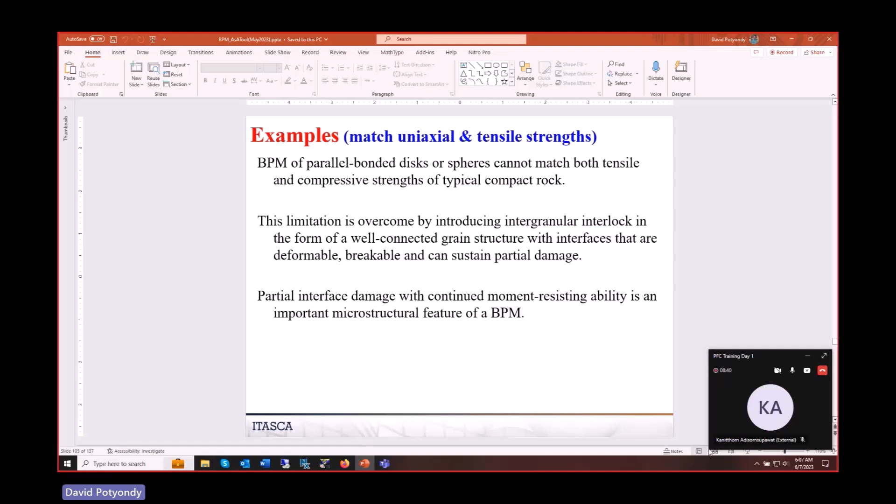It turns out that if you just use parallel bonded material, discs and spheres, you're not able to match both tension and compression, both tensile strength and compressive strength. You can match the tensile strength, but then the compressive strength is too low.

Now this is for a compact rock like granite. The compressive over tensile strength ratio of certain types of granite could be up to 30. The ratios that we get with parallel bonded discs or spheres are on the order of 5 or 6.

After many years of research by myself and others, and I can show you all kinds of journal papers from years back where people would do all these different things to try to get parallel bonded systems to achieve much higher compressive strength, we finally determined a way to do that, and it all has to do with having more interlock.

So the problem here is that with a parallel bonded system, I think it's shown here. Here's the issue. Turns out that this flat jointed material, I developed that model to solve this problem. And here's the thinking behind it.

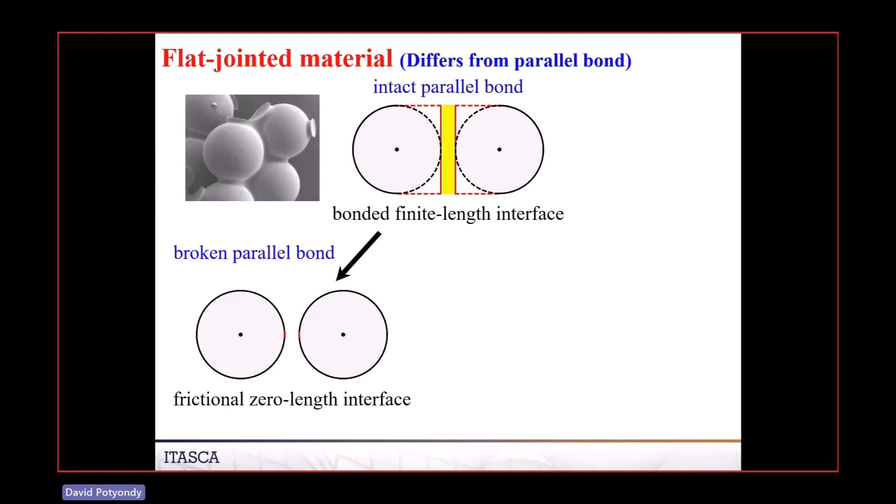But as soon as it breaks, the cement is removed, and the only thing you have now is just friction acting over that small area to try to maintain interlock, and that doesn't provide almost any interlock.

The idea with the flat joint is that notice the interface still remains - conceptually, that interface is still there. So it maintains this interlock, and the material holds itself together.

The reason this matters - let me see if I have an example - with the parallel bonded material, what you would do when you calibrate it is first do a direct tension test and choose the micro tensile strength so that you can match the macro tensile strength.

And what you find when you do such a model is that all of the damage you see in a direct tension test is micro tensile breakages, which means that the shear strength is not participating. The micro shear strength has nothing to do with the direct tensile strength.

So that means then what you do is say, okay, now I'm going to do a UCS test on this material. Now you can't change the micro tensile strength - that's done, that's been fixed. So the only thing you have left is the micro shear strength.

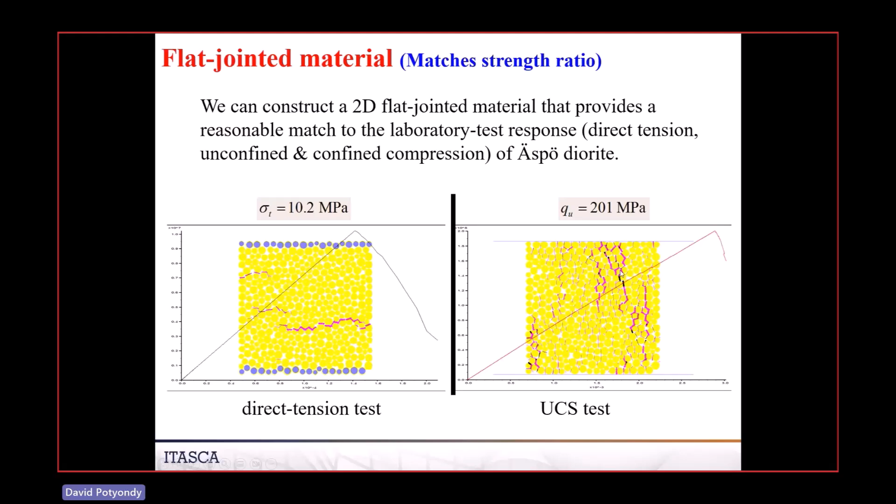The thickness of these lines is proportional to the gap, the current gap of how much open that thing is. Once at the peak, we've gotten this big amount of opening going on here, and we have quite a bit of distributed damage before that. If you look in detail at this thing, this is what's happening right at the peak load. You're basically getting a localization to happen here, and then it's proceeding downward to break the system.

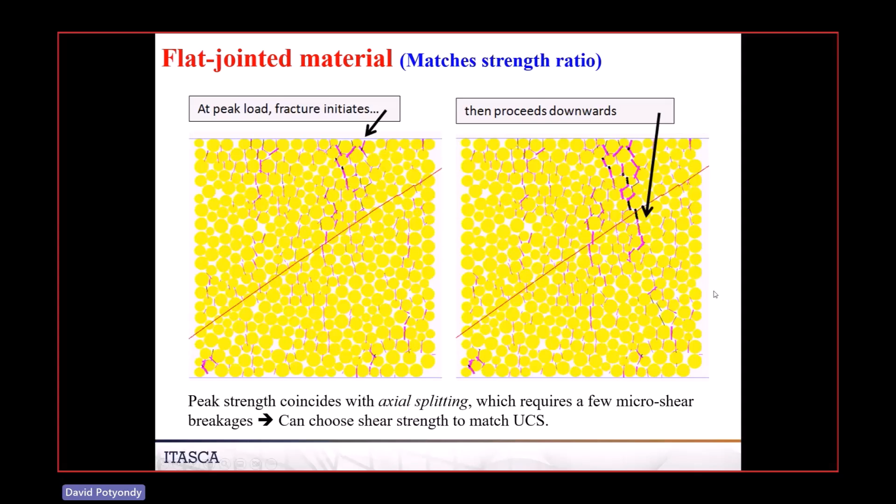In order for this to happen, the black color is micro shear failure. So in order for this thing to localize and create that axial split, there has to be some micro shear failure. That's the key thing that's allowing this thing to reach the peak, to begin to fail. So it's that micro shear strength that can be chosen to match the UCS.

If you look, it's a very sophisticated, complicated system. This is just looking at early on in the test at some region. If we zoom in on that and look carefully, we can see, for example, here, these two guys are actually rotating a little bit when you load it. There's all kinds of micro rotations that occur when you load these things.

That micro rotation now is causing tension on this side and compression on that side, and so you're getting this partial damage. If this was a parallel bonded contact, once the outer fiber reaches the tensile strength, the entire thing breaks and is removed. Whereas here, I get this distributed tensile breakage. It redistributes the load, it goes somewhere else. Here's another one that's beginning to fail.

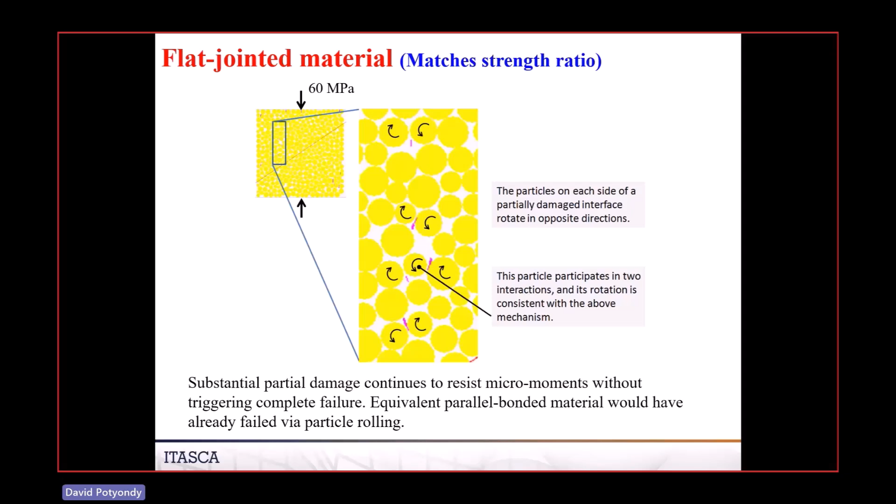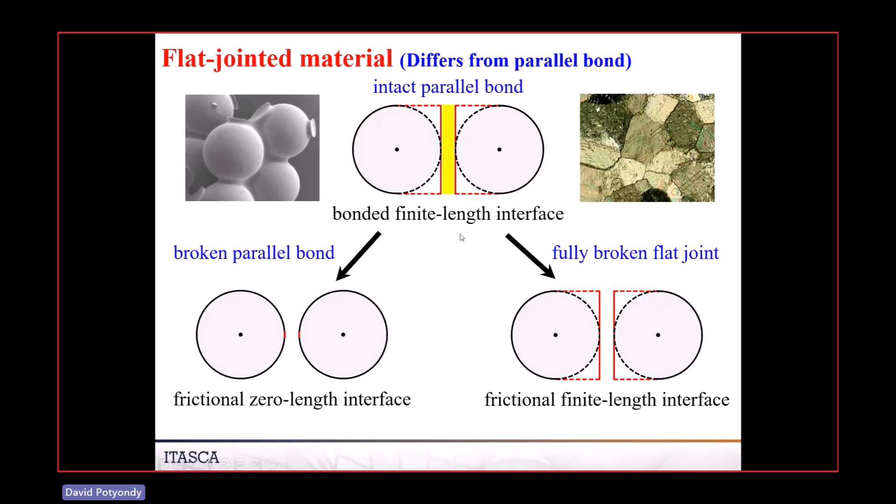This is, again, the mechanism that we have in these flat jointed materials, and we think that's the proper mechanism. Basically, the grain boundaries are not just completely breaking and disappearing. So the parallel bonded thing would probably be better for something like a sandstone than something like a compact rock like this. All right, so that's the basic idea.

Here's a little bit more of a scheme to convince us that this makes sense. We're going to build two different bonded particle models. We're going to build the one on the right, which is using disks and flat joint contacts. Remember, we can draw them in this fashion to actually see what mechanically that system looks like.

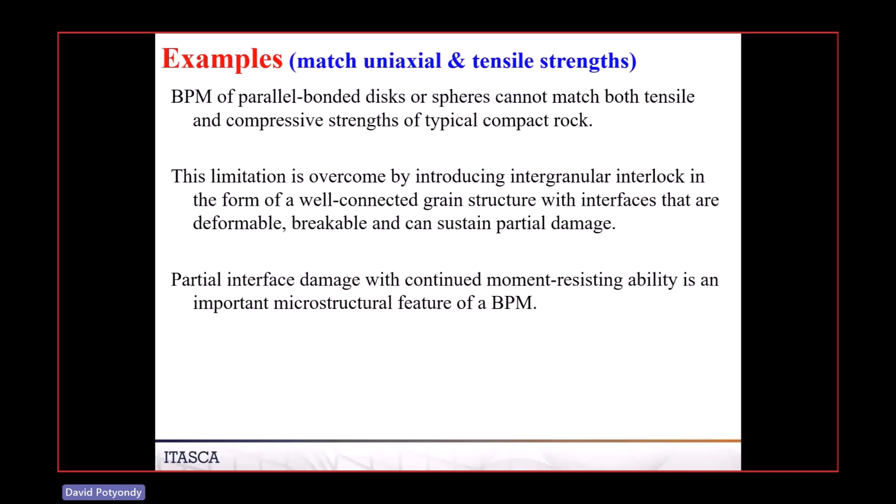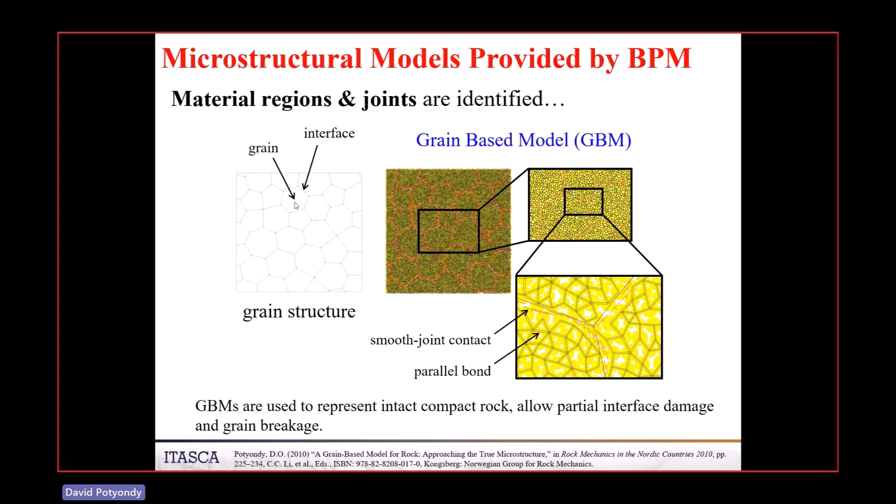Then it's also building a system that's this grain-based model. If you recall, the grain-based model looks like this, where we take a collection of disks, join them with parallel bonds, and then overlay these joints on top, so we overlay a joint structure. Inside of each one of these grains, there might be 50 or more parallel bonds, all of which can break. We call that a grain-based model. So let's compare both of these. What's the difference here?

This grain in the flat jointed thing is rigid, right? Because it's just a disk, it's a PFC particle, it doesn't deform. This grain is deformable and it's also breakable. There's an interface between the grains.

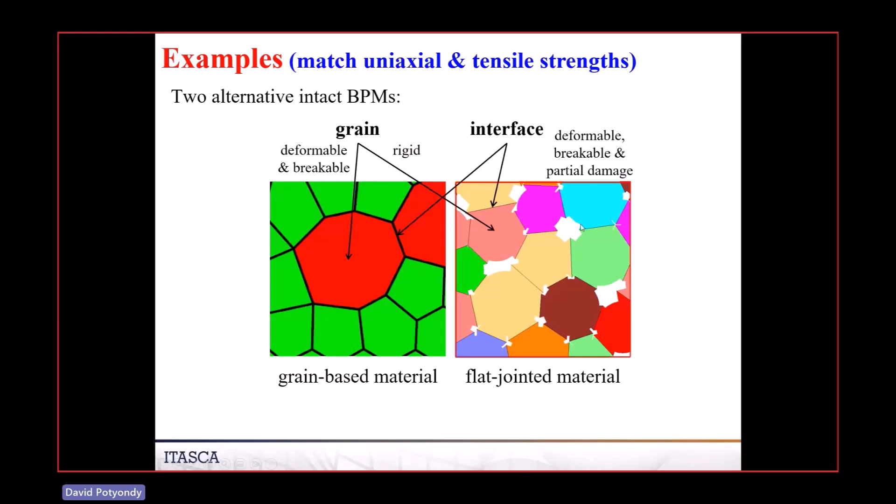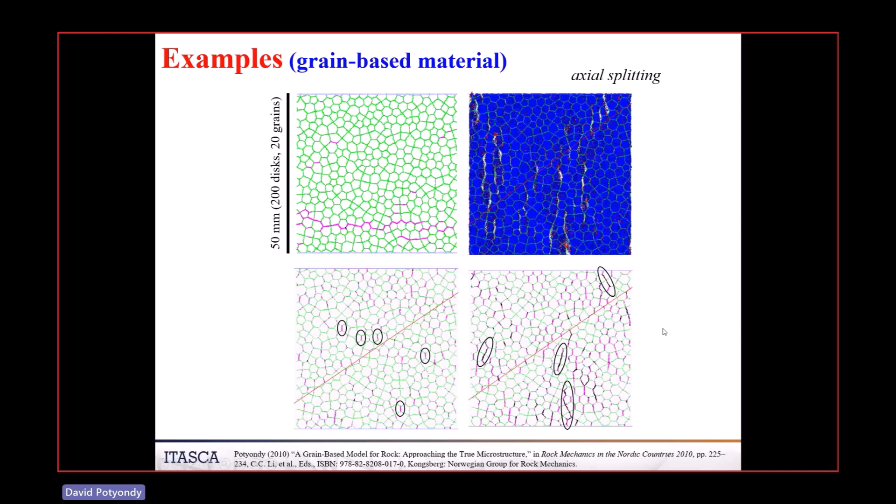This grain-based model was set up to have infinite strength inside the grains. So even without grain breakage, we're getting a very good calibrated response similar to something like a granite or a diorite. Now let's look at the flat jointed material for that same sort of thing.

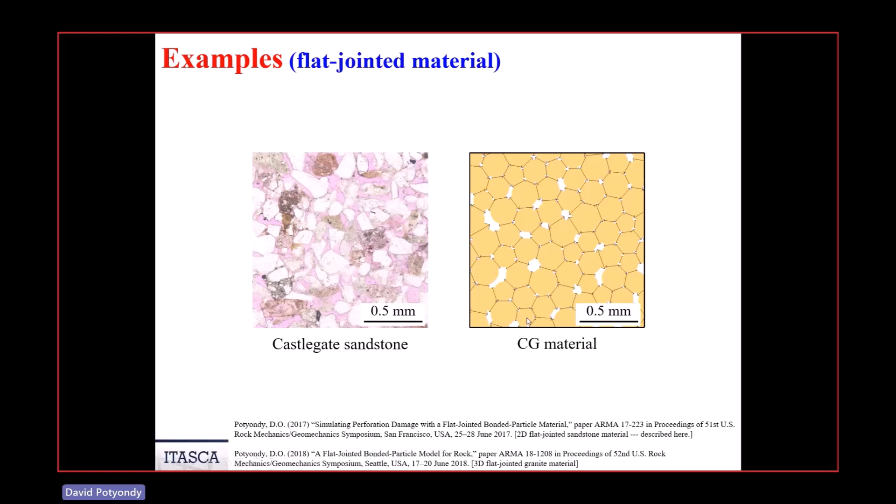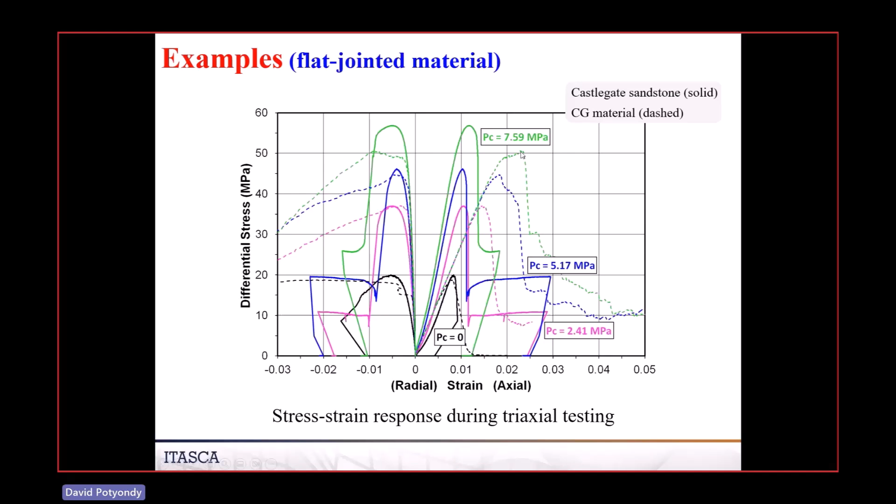The dotted lines are the PFC material subjected to the same confinement conditions. What we're seeing here is the PFC material has the same slope because we don't have any initial cracks in this system, it's all well connected for this model. But notice how the strengths, we're getting about the same strength increases with confinement as we were for the Castlegate sandstone.

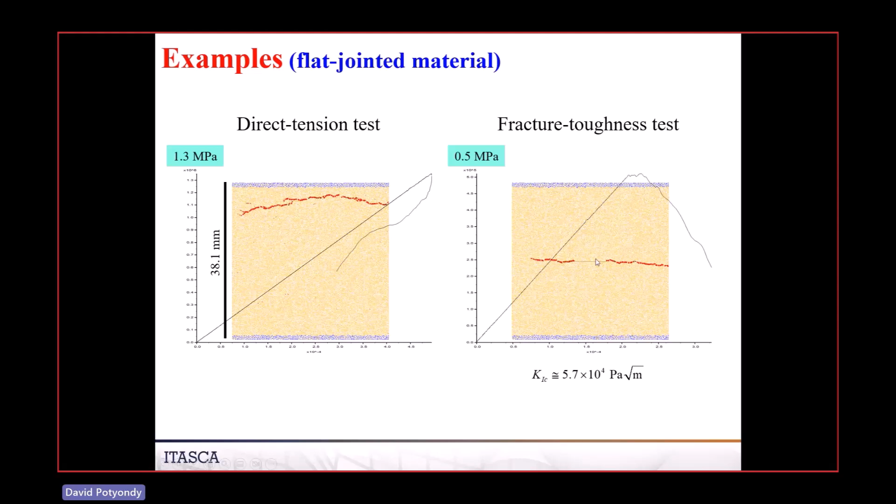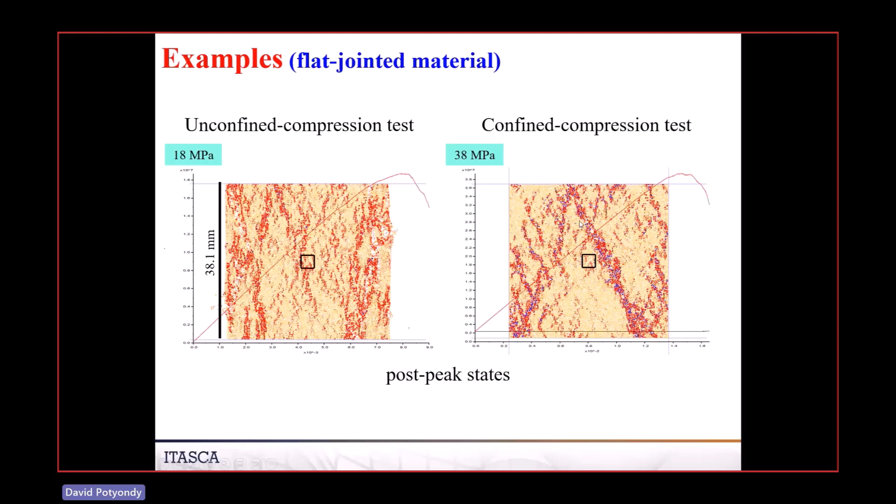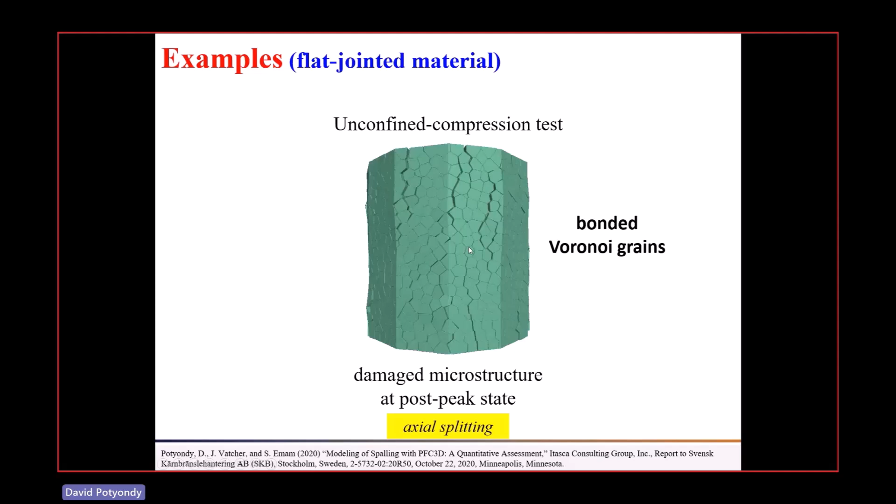The same sort of thing happens if you do the bonded Voronoi grains. We've seen this one as kind of a funny slide before, where you're getting that axial splitting.

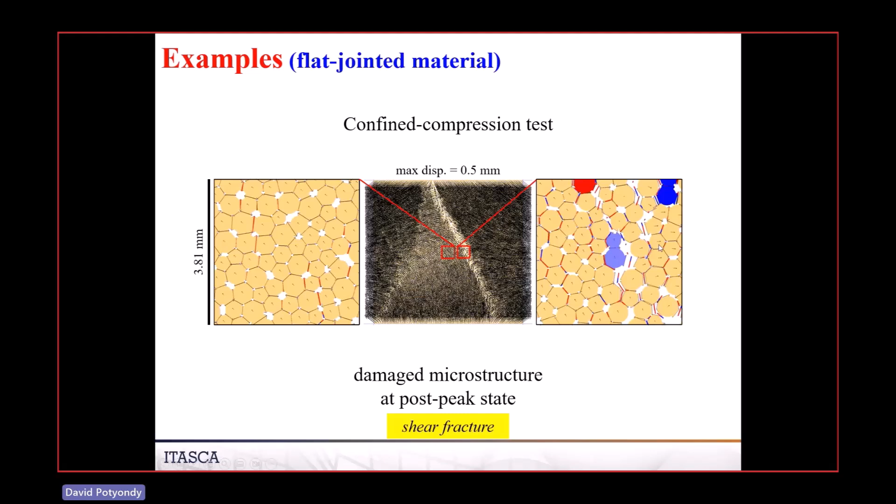Again, the blue, there's all this micro shear failure. This is the detailed internal microstructure inside the shear band, which has all kinds of information about how that's failing. This is another way of looking at that same thing.

This is the fragments that it has broken into. And then this is the same system, but now we're just looking at basically the broken bonds, the broken elements. Again, thickness is proportional to the magnitude of how much they're open. So you can see there's all kinds of partial damage in here, but the main deformation is happening where these guys are bigger.

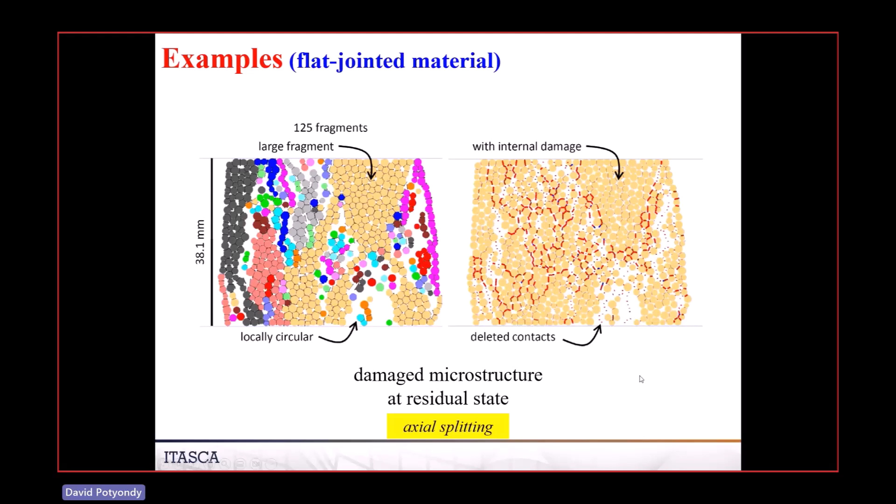This is on the left, unconfined tests. This is in the post-peak region, and again, you can see this is right at the peak. And then if you continue to apply strain, so the stress has dropped almost to zero, you can see how it's breaking up into these axially aligned columns.

And then if you do the same material, but you apply confinement, now you're getting this shear fracture. So the stress strain curve looks like this, has this residual value. So this peak, at the peak here, just past the peak, this is what the system looks like, it's just beginning to form a shear band.

If you keep applying more axial strain, it drops down and comes to a residual value, and that's because these shear bands are now fully formed. Once they're fully formed, we have a kinematic mechanism where we have these fractures with friction on them effectively. And so that's now this residual system, and that's why this thing goes down and then reaches this residual value.

If you apply more confinement, you get the same type of behavior, but the point A and point B are higher. So this seems to be a very good representation of the steps that are going on in a rock as you load it.

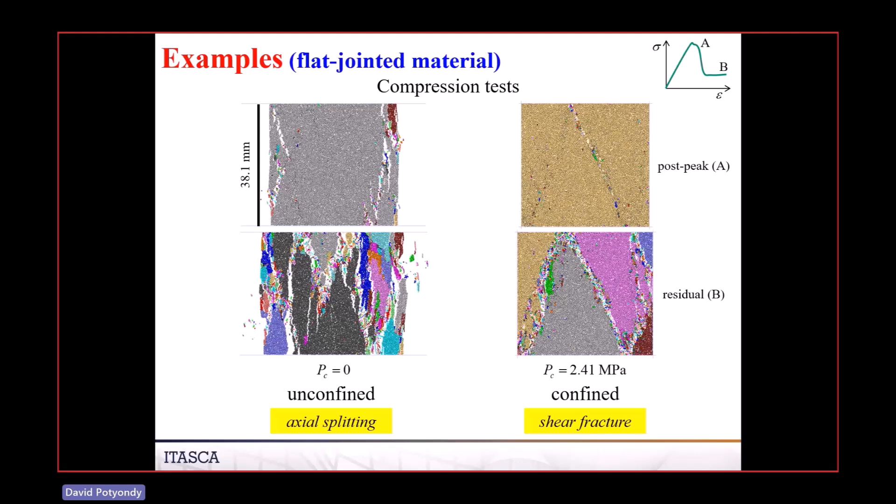Just a few other things to show here. We wanted to see if we could construct a rock that was anisotropic, that was transversely anisotropic. So we take and bond these things together, putting in these joints by means of smooth joints, and then we do UCS tests oriented at different angles.

This test is loading this way, this test is loading that way—at a different angle with respect to all those little joints in there. We make those interfaces softer and weaker than the layer material, and then we see these different failure mechanisms. When it's at an angle, when you reach the peak, it's failing because you're triggering sliding along these interfaces. When it's like this, you don't get sliding—it's just the intact part of the system that has to fail.

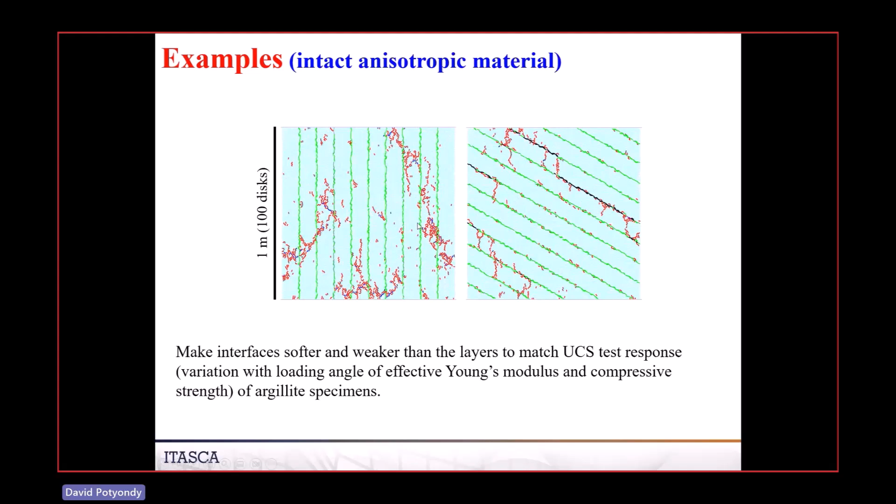The result is that we get the variation of both. This is modulus with loading angle. When it's loaded this way, it has a high modulus, but when it's loaded this other way, since these interfaces are softer, you're measuring that stiffness. This is then compared with lab data for this particular argillite.

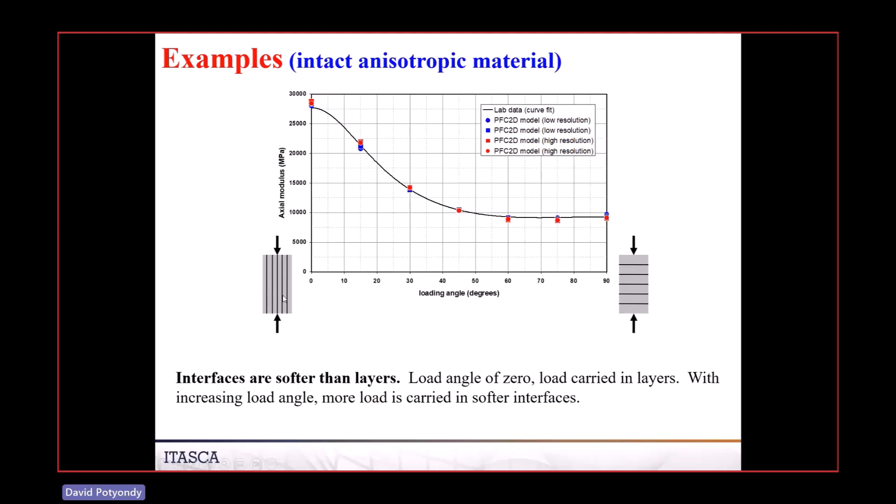So that's the modulus variation, but you're also getting the same sort of strength variation—this is the UCS versus the loading angle, and you basically get this curve. You can build simple theoretical models of these things and see this same sort of curve. Once you get to a 45-degree angle, you start getting failure along the interfaces, which makes it weaker. But when you're oriented like this and like this, you're getting failure on the intact material, which makes it stronger. So this seems to make sense.

So we're putting in the anisotropy. Now if you're doing something like a shale, you have this anisotropy, but these layers are super close together, and I don't know how to do that with a bonded system. So this is a bit of a demonstration that the general idea makes sense, but we wouldn't really have enough resolution to make it anisotropic where the layers are so close.

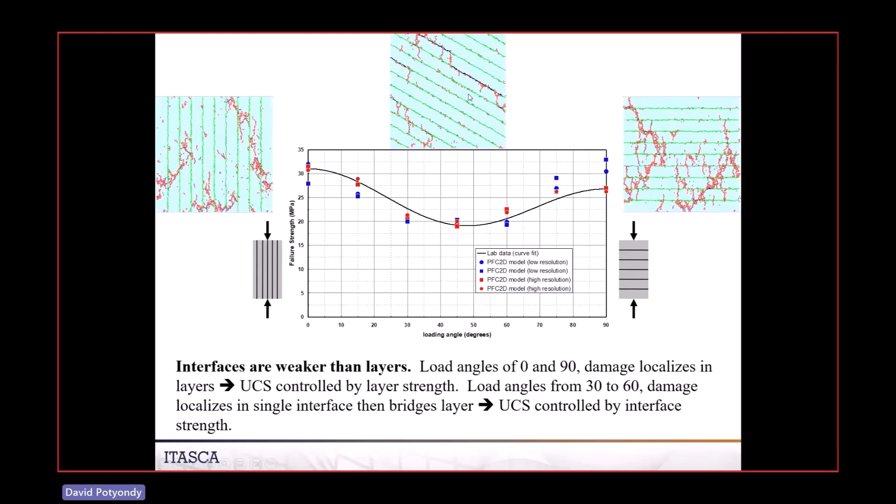This is just an example of some work before where we put in basically suction forces at the contacts, and we link that to the amount of saturation in the system by means of two-phase flow theory. Then you can take that system and start drying it out, and as you dry it out, you start increasing the suction.

As we take a system from a saturation of 0.97 and reduce the saturation a little bit, that increases the suction. What you then see is this evolution where it begins to fail at these tensile breakages, and the boundary condition is fully fixed all around. So you've got this shrinking material fully fixed on the boundary—it's sucking itself in, and that then localizes, and those localizations grow and eventually go across the whole thing.

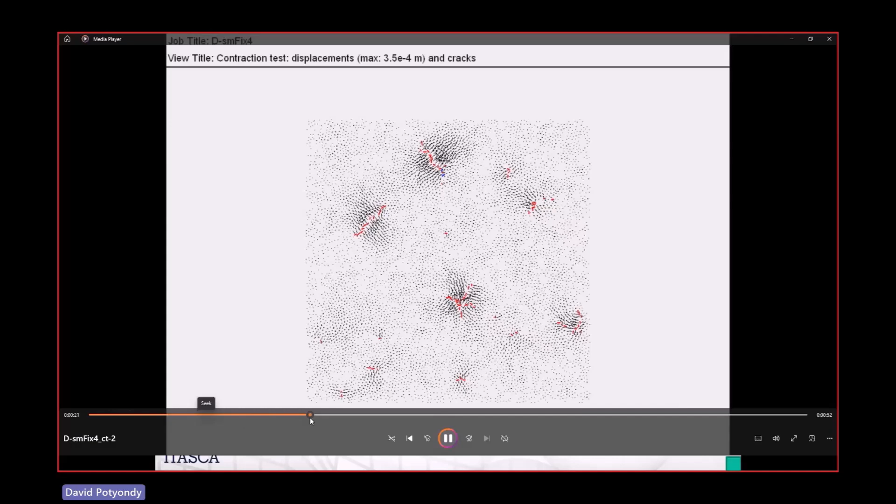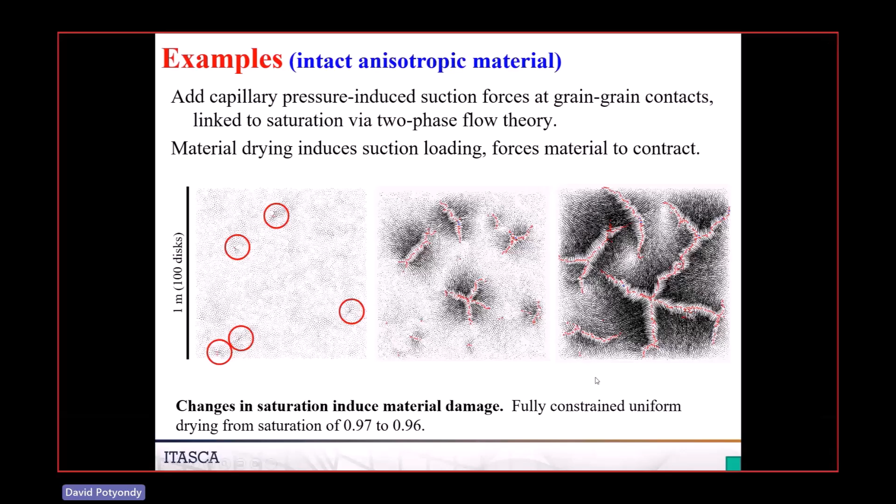This is similar to desiccation cracking of a clay. If I speed things up, you can see they're initiating, then interacting, and forming something like this. So that was some work just showing that, adding a saturation type concept to a saturated material.

This is work where we were modeling, again, a stope in a deep underground mine in South Africa. What we did is use a PFC region in the tip of the stope, embedded in a much larger continuum grid. These stresses are very high—you can see that sigma y is 100 MPa, sigma x is 60 MPa.

This is a coupling scheme whereby we create a bonded system in this region of space. We identify the boundary particles, and then we map each boundary particle into the edge of an element. The forces acting on these boundary particles get sent as traction boundaries to the continuum grid.

Meanwhile, the deformation of the edges of these zones is imposed by these boundary particles, so effectively they're glued to the surfaces. You build a big grid, delete all the zones where you're going to put the PFC material, and then couple this. Every time you take a time step in one code, you take a time step in the other, and they exchange information across the boundary.

This is now part of PFC. This was done back in 2012, and it's built into PFC now so that you can couple PFC with FLAC3D.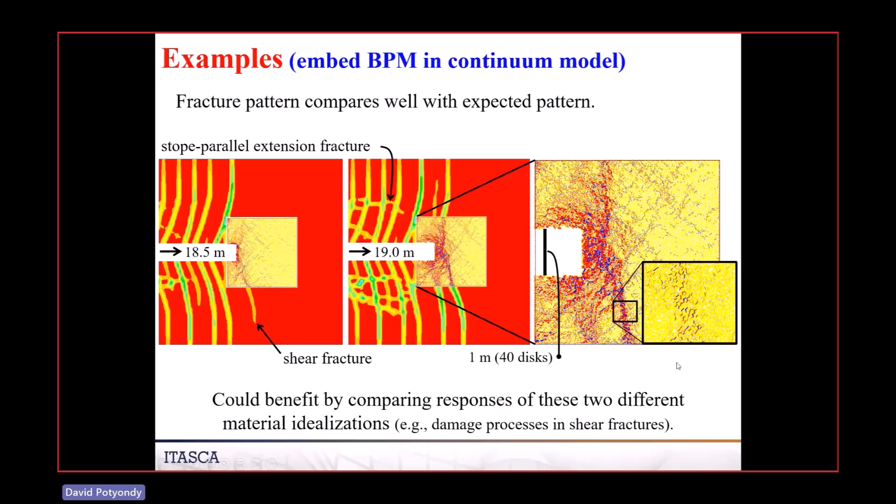Conclusions: I'd argue this type of modeling is still in an early phase of development, meaning we're just beginning to have different models for different types of rock. What we typically do is say, here's a rock, here's its tensile strength, its UCS and modulus, and we create a microstructure and calibrate its micro properties to match that.

We're just now beginning to build different sorts of contact models and different sorts of microstructures, to represent, say, a sandstone for a porous rock versus a granite where it's well connected.

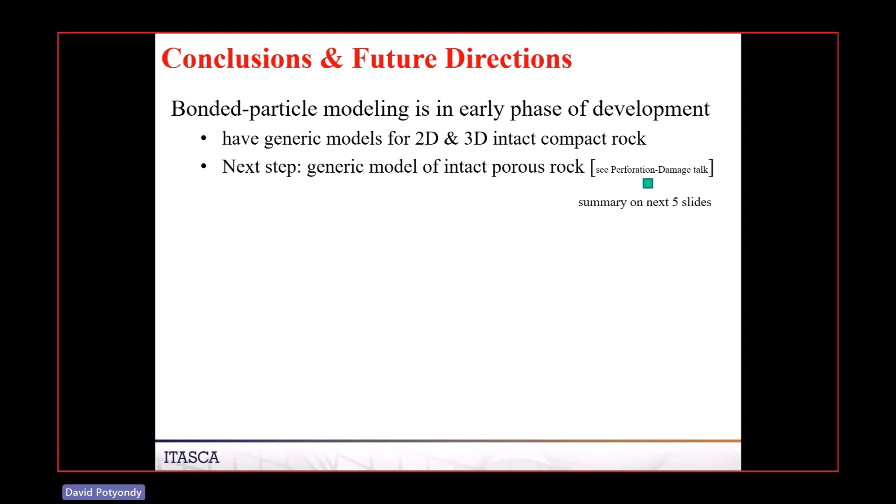There's a whole talk about this perforation damage work I did for BP originally, and I won't go through that here. Instead, I'll give a brief summary over the next few slides. That work was done with 2D flat-jointed material, as if you have a sandstone with a borehole, and you apply high stresses on the boundary, you start getting damage and eventually the hole will collapse.

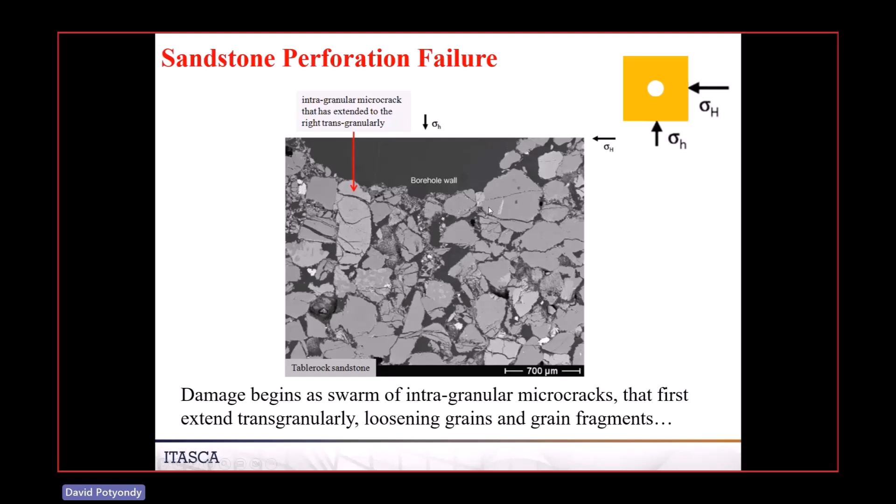The damage, if you look closely, notice the length scale, 700 microns. This was work done by Professor Haimson at University of Wisconsin-Madison some years ago, on Tablerock sandstone. You get a swarm of broken material very close to the borehole wall, consisting of breakages along grain boundaries and through the grains themselves, which are clearly splitting.

Then, at a larger scale—1 millimeter here—if you zoom back a little, you start to see these fractures form and fragments of broken material. If there's fluid flowing in here, these fragments can then get carried away.

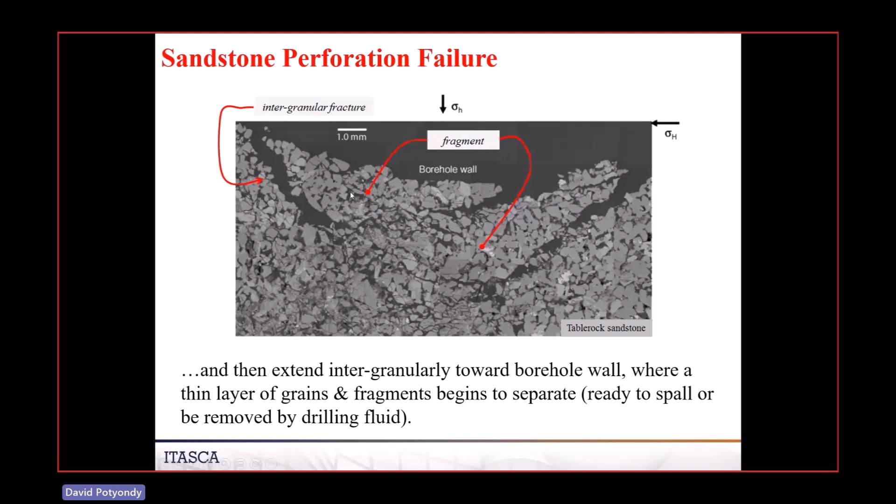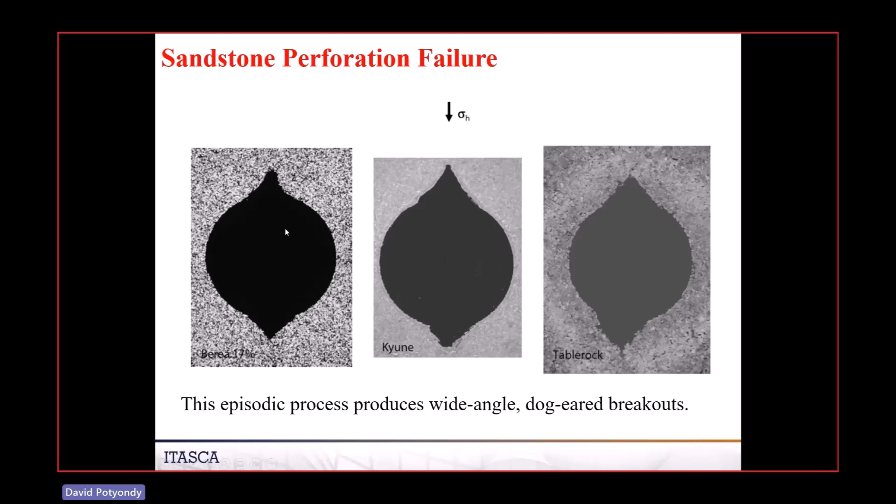This process eventually forms a stable configuration, and they look like this. They call these things breakouts.

This is the modeling done for that situation: a thick-walled cylinder test where you take a cylinder of rock, drill a hole down the middle, put it in a triaxial cell. Typically you apply no confinement on the inside wall, and in the triaxial cell you apply pressure on the boundary, increasing it until the specimen fails.

We applied pressure using an algorithm where we find the particles on the surface, conceptually construct a chain, and based on the pressure and the local orientation of this chain, we apply an external force to those particles.

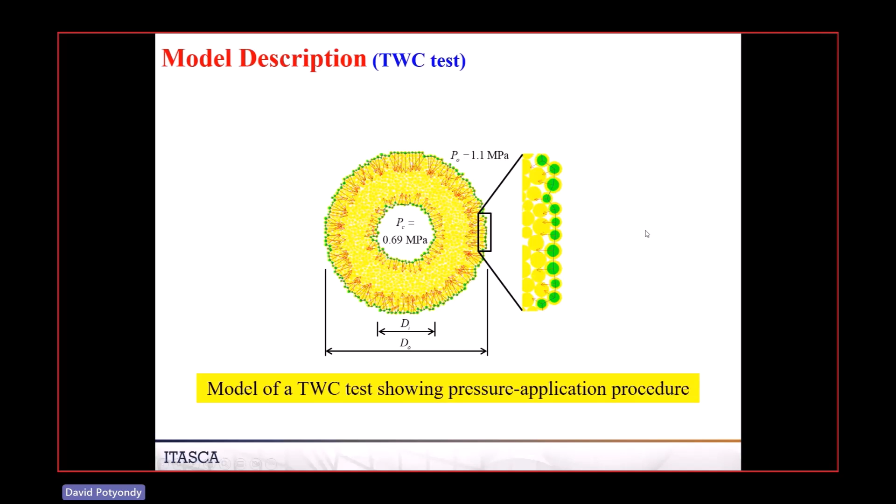So this is our pressure application procedure. There was also some tests done with confinement on there. In that talk, we talk much more in detail about all this stuff. But here's the very powerful results here.

So what we're doing for this model is we are increasing this outer pressure from 30 MPa, and then increasing it to 30.5, and you're going to watch how the material deforms in response to that and how it begins to form this breakout notch.

So if we look at the damage, these colored things are fragments that have formed. Notice at this point, this thing was loaded to 30 megapascals on the outer boundary. And at that point, this is the damage that existed, because this doesn't just go from no damage to failure. It slowly progresses in damage as you increase the outside pressure.

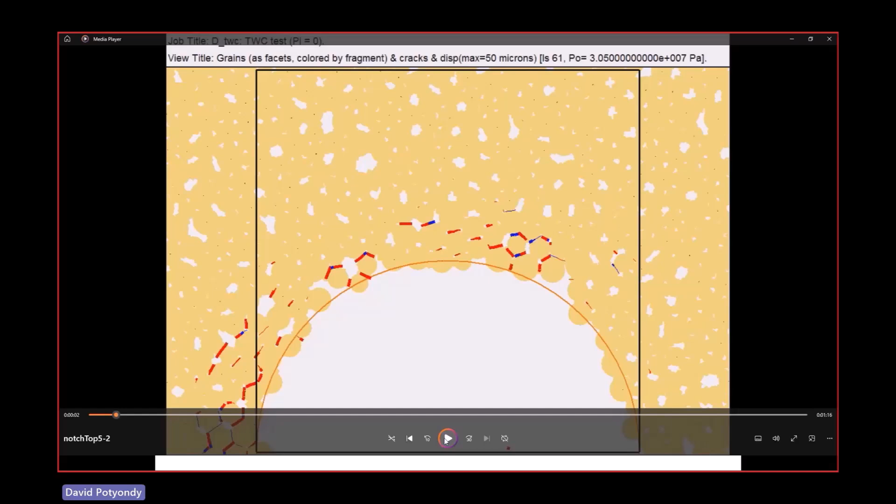Now as we apply this load from 30 to 30.5, and we watch the system readjust, we set all the displacements to 0 as a reference, and we just want to look at the deformation and damage that's forming due to this little increment of load. What you will see is this notch begin to develop, and you're seeing the displacement field begin to develop.

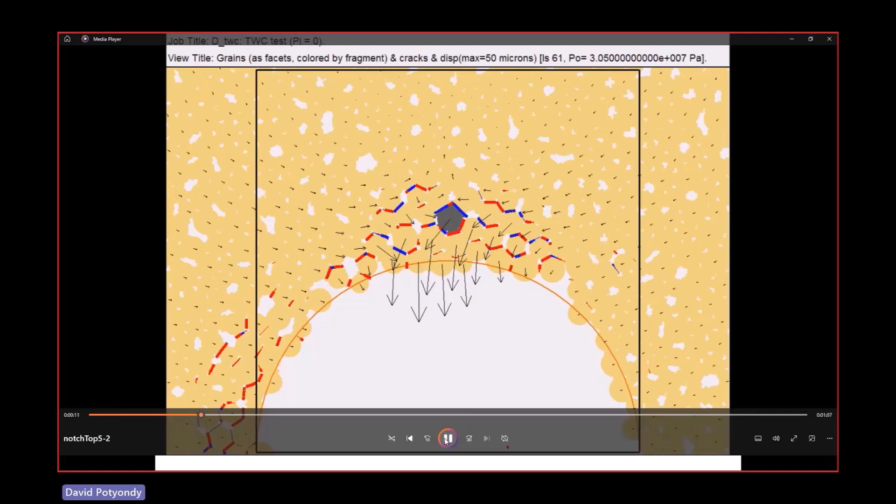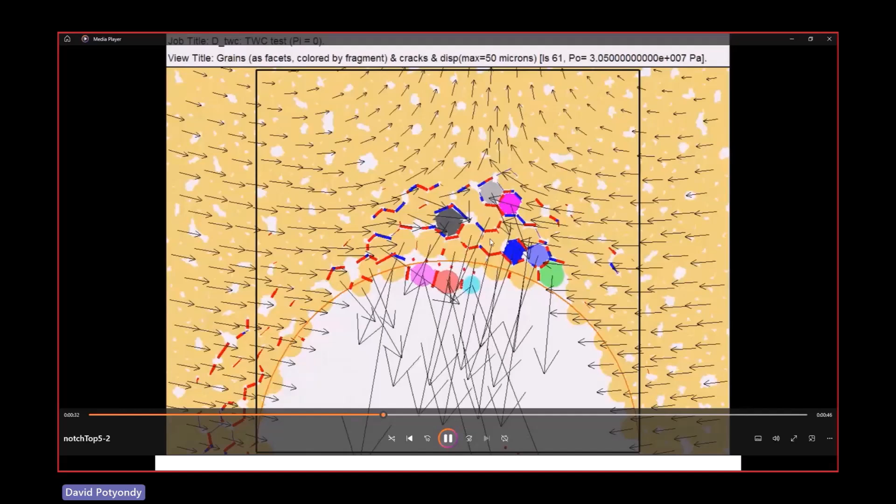And you can see how this notch is dilating inward, and you can see how the displacement field, because this is softer now, moves upward. And what you do is you form a very high compressive region up here, and that's what stops the damage from forming. You can see the big dilation, and you can see these regions here. These are the breakages, the fragments that are forming. So you're getting these surface parallel fragments that are forming.

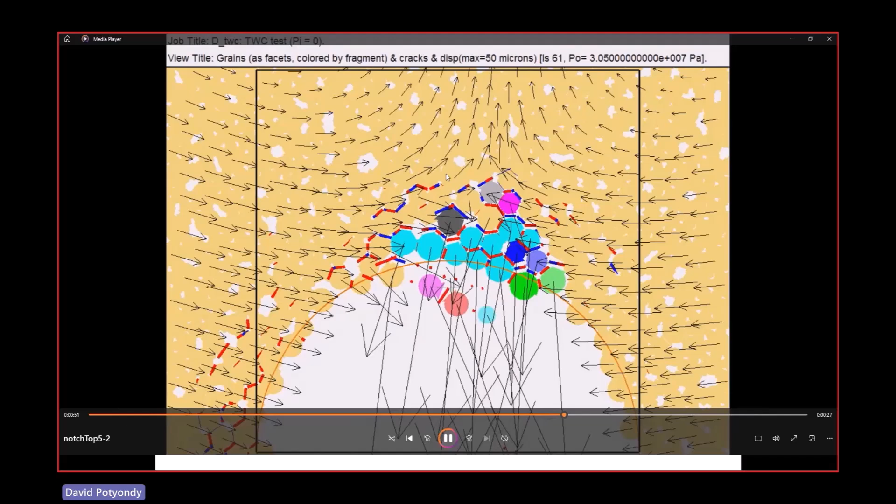This, by the way, is a super crude model with very large particles. We of course ran images of particle systems with much smaller particles and got the same type of response at a much higher and better resolution. I can show you that in that talk if you're interested. But this is a good illustration of the behavior.

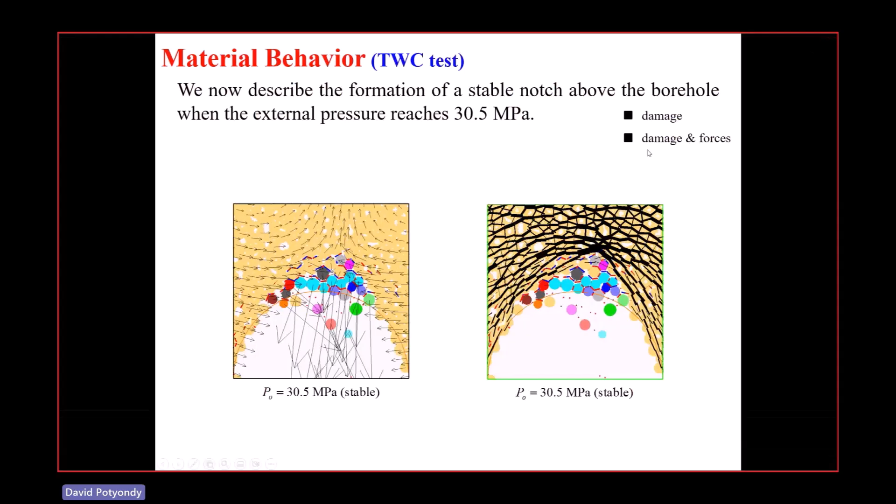Now let's look at the same system, but let's look at the force chains. This is the initial system where, because there is some of this damage here, this material is a little bit less stiff. And so you're beginning to see some arching. Thickness is proportional to magnitude of these force chains.

As this material, you're going to see as those cracks happen, this material softens, it redirects the stresses up into the rock, producing a big region of compression. And as we all know, the more confinement you have on a rock, the stronger it gets. That's why these breakouts are stable.

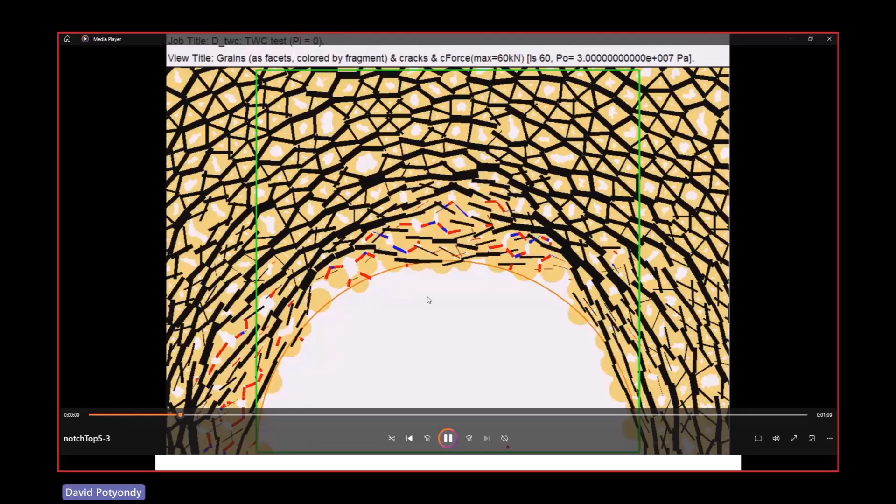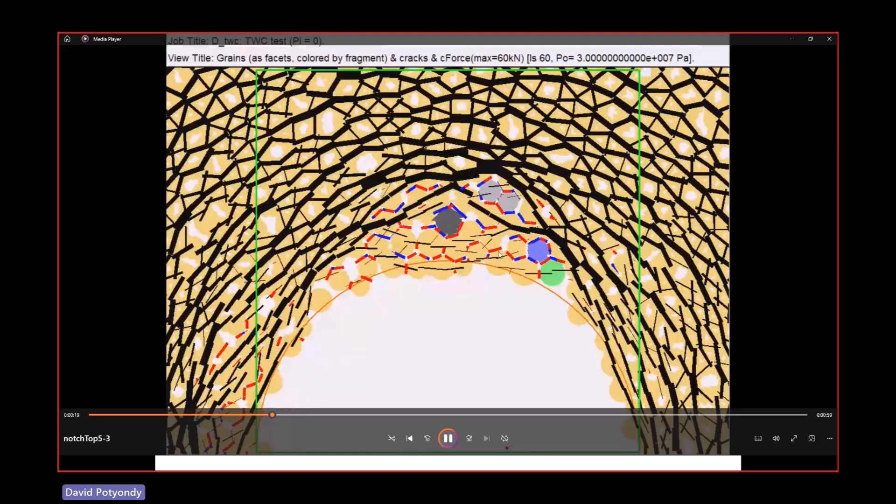So if we watch this, you're going to see as this starts to break, watch the force chains rearrange in response to that. Look at how it's forming this very high compression region at the tip. As more damage occurs, there's almost no load being carried in this broken material anymore.

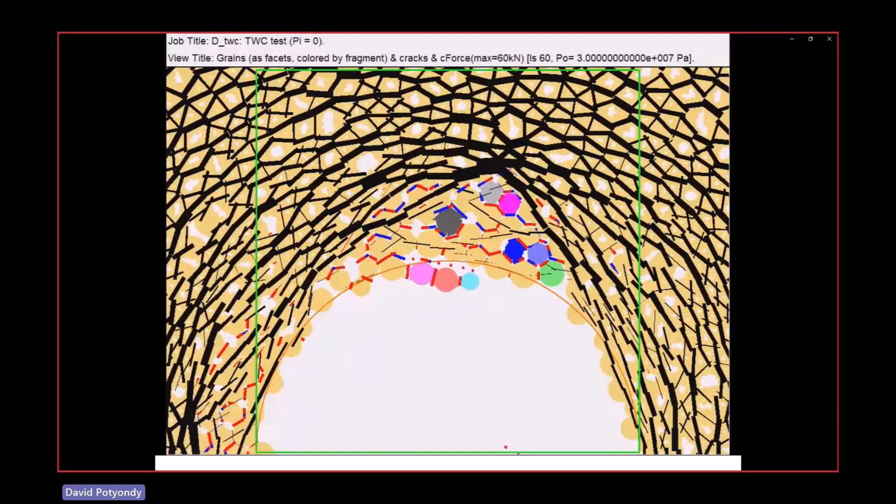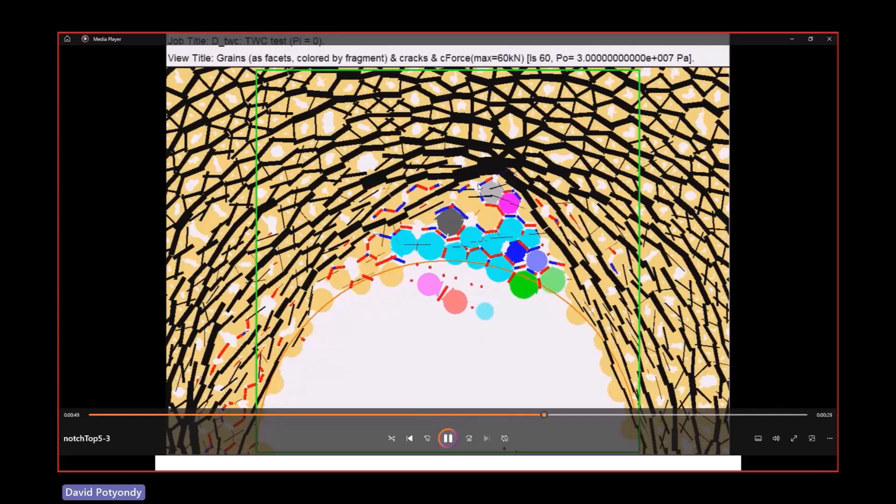And again, this is the mechanism as to why you get these borehole breakouts. The borehole breakouts have this tendency, they have these surface aligned fractures and fragments that form. And so that's what we're seeing here. Notice at this point, this is almost pretty much fully formed. And now we've got this big compression region at the tip of that notch, which is shutting down the process.

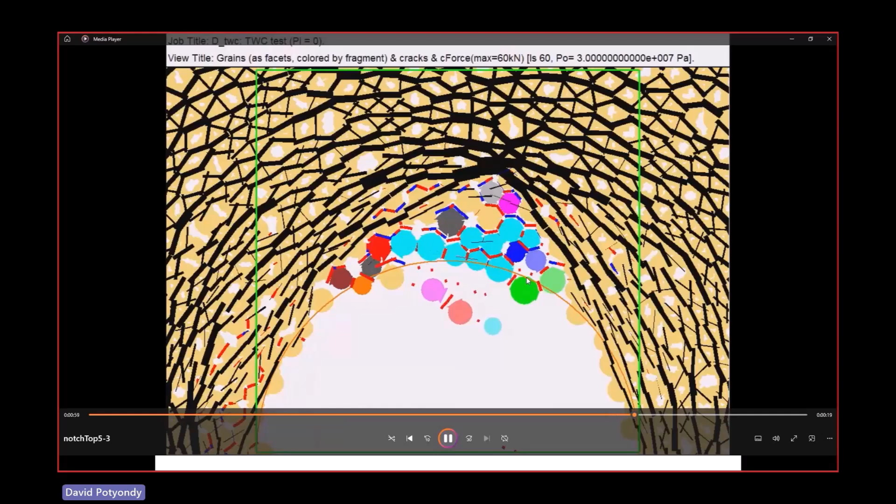So then again, obviously, if we increase the load a little more, this thing can grow. Eventually, these things fail in a very interesting way.

This type of modeling is only going to get better as you have better and better resolution, more and more particles. That means you have to run faster models. We do have the multi-threading already in there, and it works quite well, and it's totally hidden from you as a user. You don't care, it just automatically works in the background. We are developing this business to be able to run this on these big clusters of machines.

Some years back, BP funded ITASCA for a number of years, probably on the order of 800 or more thousand dollars, to take PFC 3D and make it work for hydraulic fracturing, large scale hydraulic fracturing.

What was done is we built an assembly of PFC 3D particles to begin with, a big giant system, and then wrote a whole new code which takes the PFC code and strips out all of the logic that does contact detection. So what you have is an enormous collection of arbitrarily oriented springs, and the only thing that can happen is those springs can break. Because of that, it runs like 10 to 20 times faster than PFC, because most of the computation in these models is contact detection of new contacts forming.

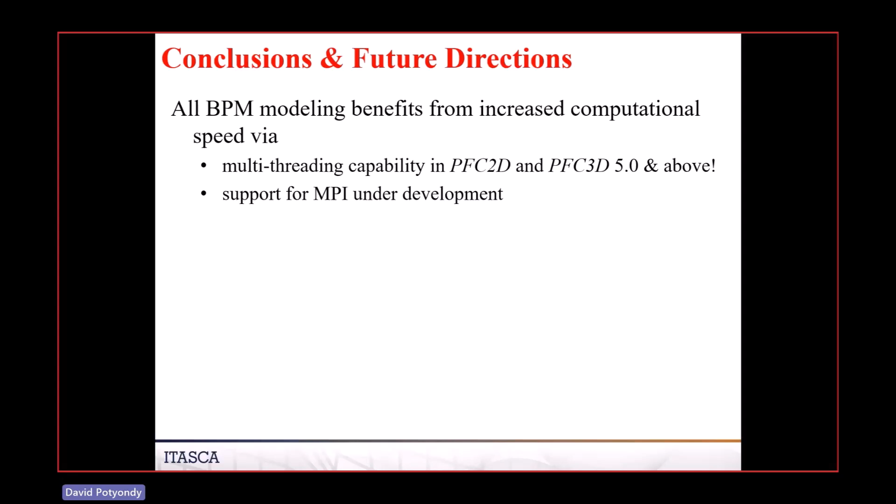So I'm mentioning that as an example that this scheme can be made to work under MPI, and we know how to do it. We've already done parts of PFC to make it do that, but it's not like it'll be ready in a year - probably it almost for sure won't.

As we achieve faster computational speed, we can also begin to do these boundary value problems, where you have a local region around a tunnel, just like that stope advancement. And we're going to do more and more of this. Most of the work with bonded particle models has been looking at specimen scale things, doing compression tests and tension tests, then looking at the effects of different microstructural things. Or some people have built PFC models and run them through different strain paths, these specimens, and based on that you can develop a constitutive model to be used in something else.

When we start to apply these bonded particle systems to boundary value problems, we start to have these scale effects - we see this in the model. What do I mean by that? I'll give you the example of what we learned in that perforation damage study, the thick-walled cylinder test. It's like a bigger scale model in a sense, a non-traditional test, let's say.

What we found is that we constructed a PFC 2D flat jointed material. We were able to show that we could match the tensile strength and the UCS and the increase of strength with confinement. We then built a series of those PFC materials with smaller and smaller particles, and we were able to show that we got the same UCS and the same tensile strength. So for those properties, we were independent of particle size.

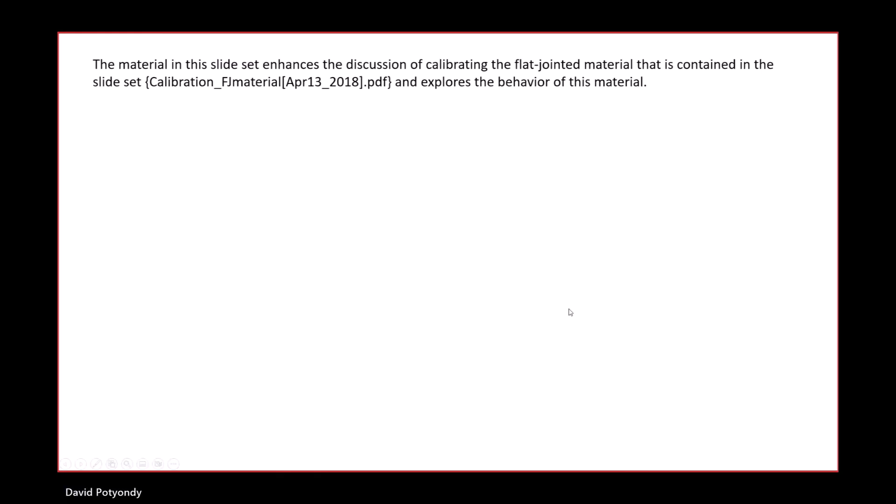I don't remember what this button is going to do. Let's go see - oh, that's something else. Wait, yeah, this is actually a discussion of those scale effect things. Since I've already talked about this, let me see what this is here. Let me show you this.

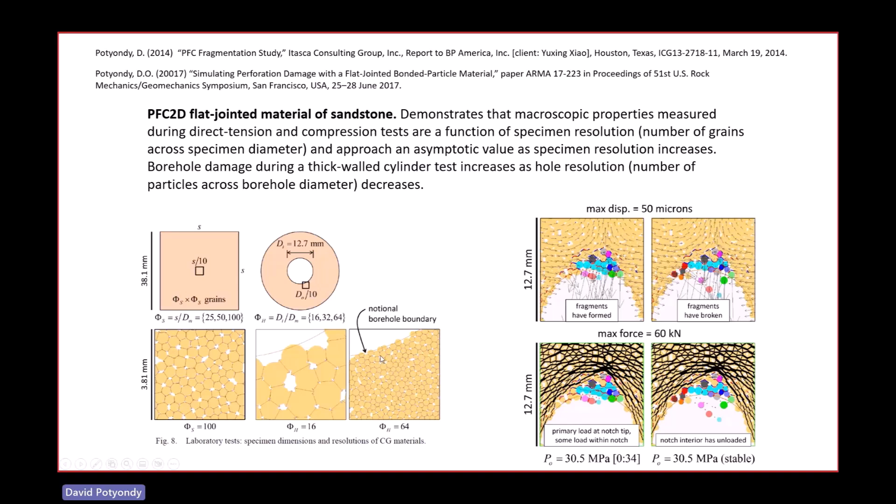This was an example of that system where we built these specimens. And then as we change the particle size, we have this type of resolution on the boundary - that's the boundary - or we have this type of resolution, and this is showing it's getting weaker as we go.

We don't need to talk about all that other stuff right now. Okay.

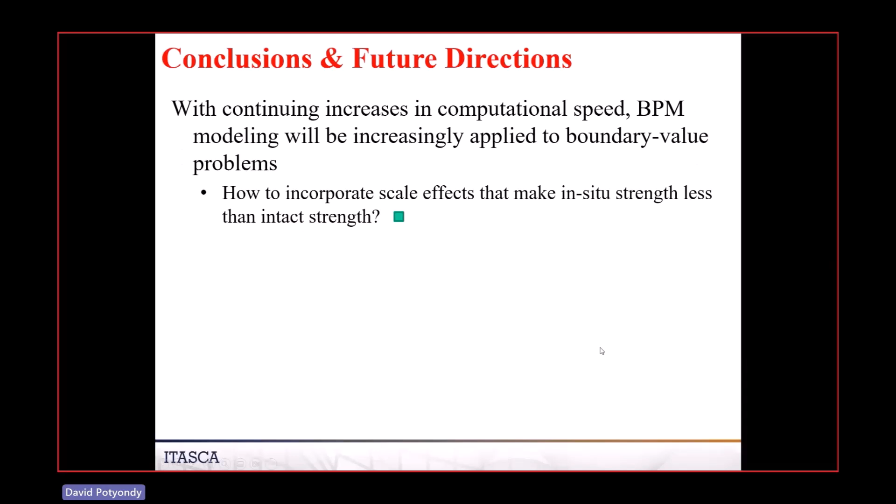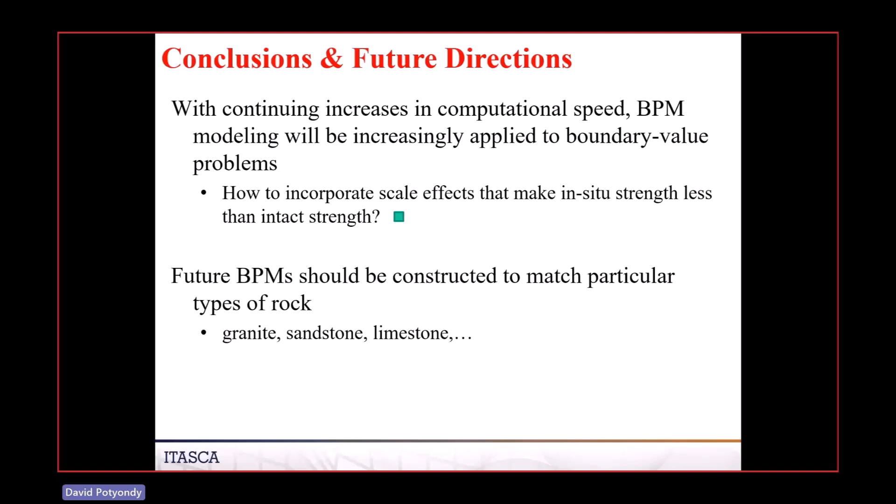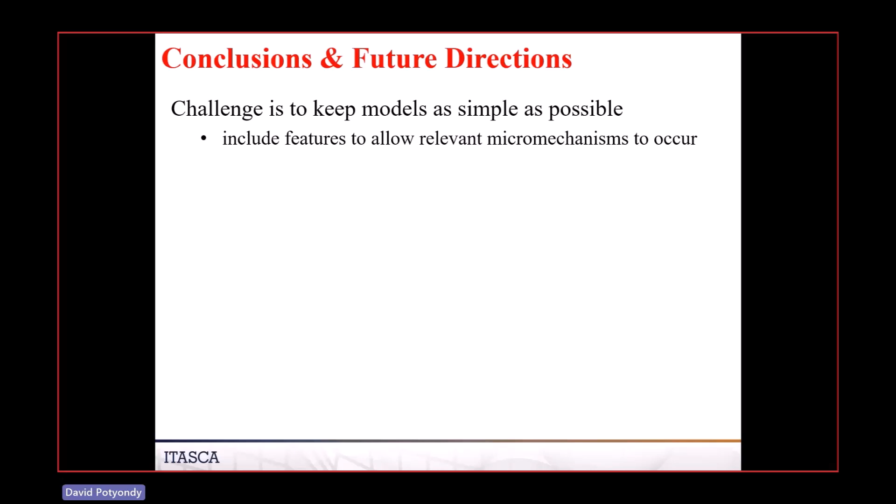This is what I would suggest - we're now starting to do this, to say this is a type of representation for granite, this is a different type of microstructure for a sandstone, etc. Again, you always want to keep these things as simple as possible. You only want to include necessary things, but to do that you still have to have the relevant micromechanisms. If there's a certain thing happening at the micro level, the model has to be able to do that too. That's the guiding philosophy of this type of modeling.

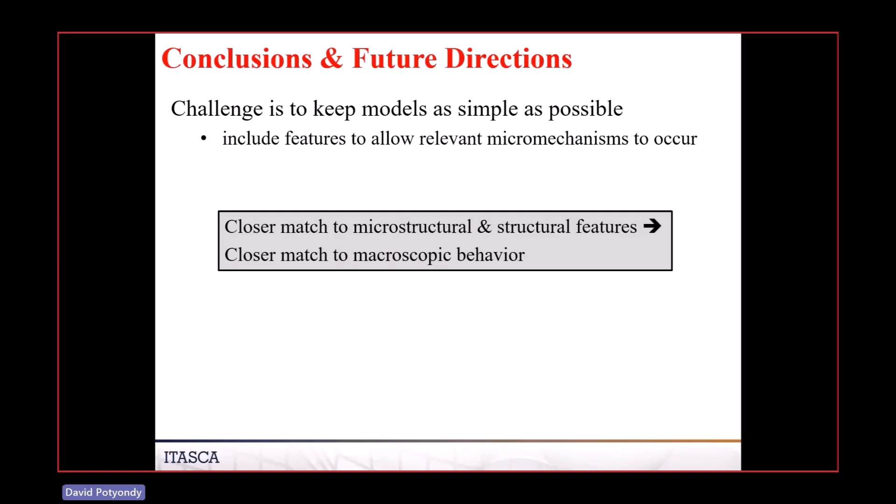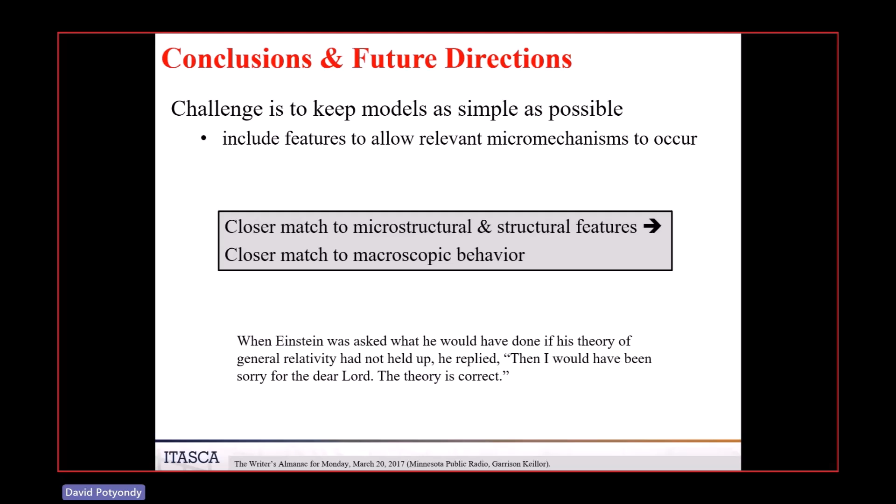I'll close with a quote from Einstein. When Einstein was asked what he would have done if his theory of general relativity had not held up, he replied, 'Then I would have been sorry for the dear Lord. The theory is correct.' So that's the end of this bonded particle model discussion.